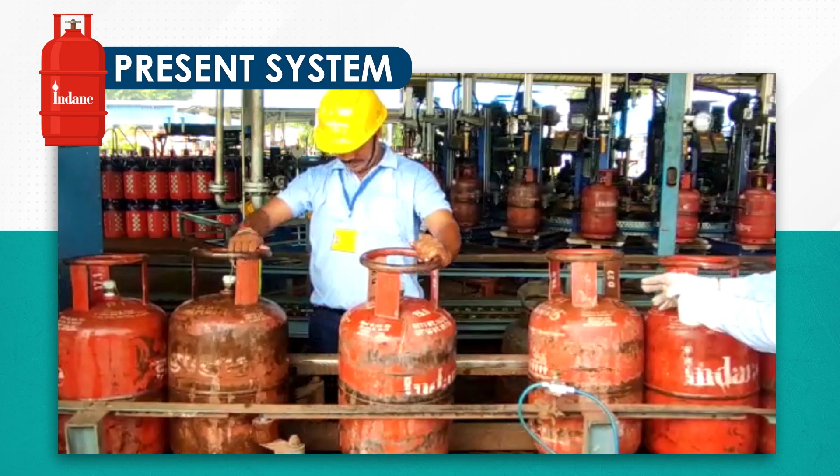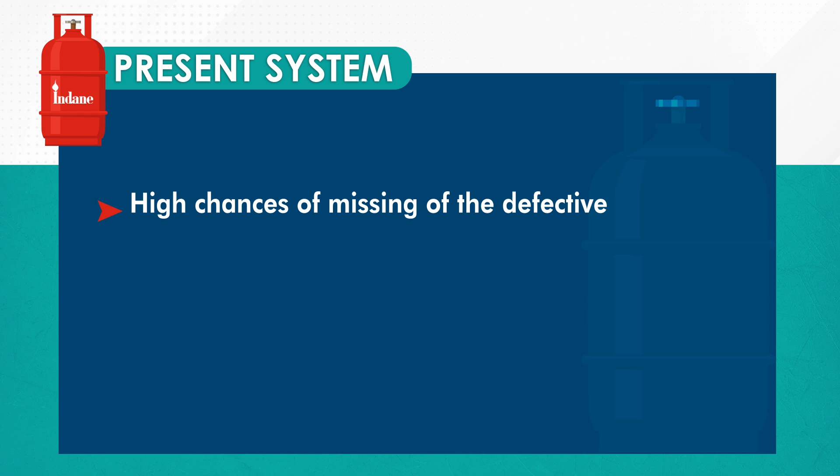Presently, haulage manpower is deployed at the plant for segregation of cylinders not fit for filling due to damaged VP ring and foot ring. These cylinders are sent for the VP ring foot ring straightener machine for further repair. There are high chances of missing a defective cylinder in the routine job by contract workers, requiring continuous monitoring and manual intervention.

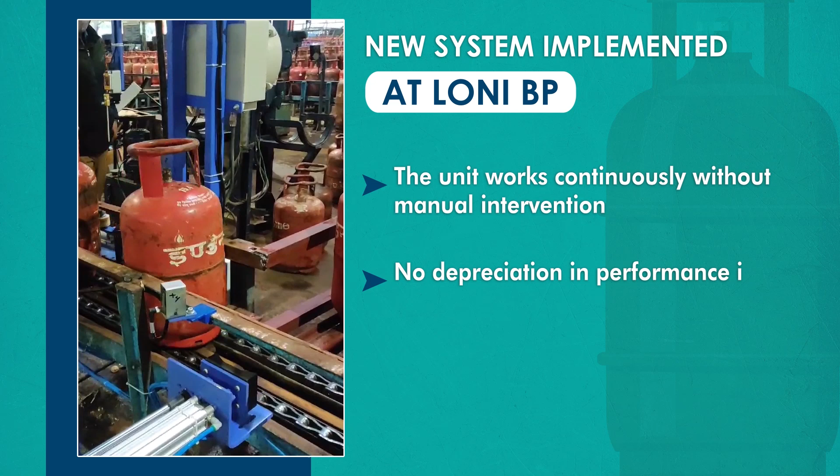A new system has been implemented at Loni BP. The unit works continuously without manual intervention, with no depreciation in performance throughout the day. One contract manpower is saved, which was previously deployed for HR segregation.

Working of the HR segregator: whenever a cylinder passes through sensor 1, the stopper stops another incoming cylinder.

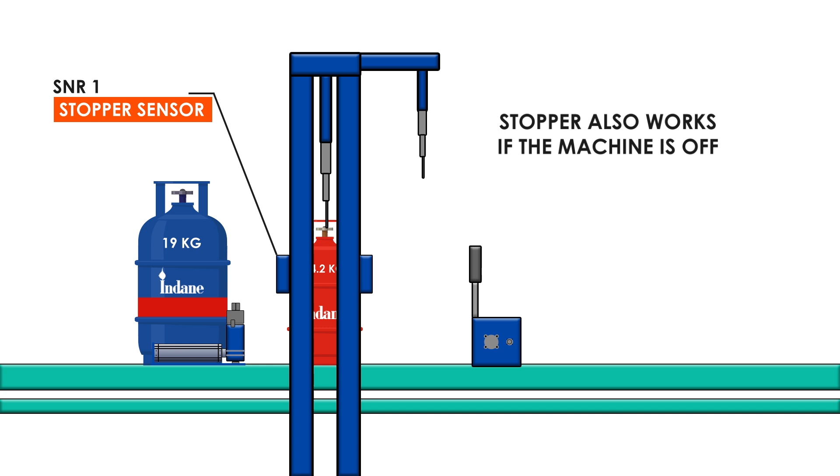This stopper also stops even when the machine is in the off condition. The stopper will also work if sensor 5 is active, indicating a downstream jamming case, irrespective of whether the machine is in operation or not.

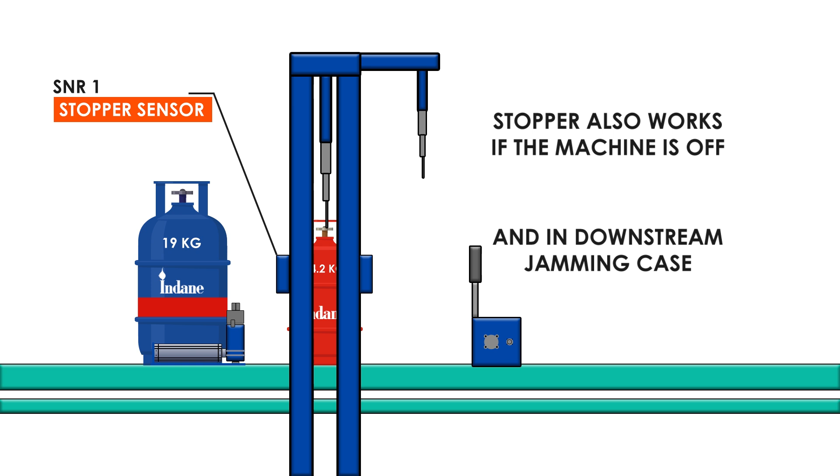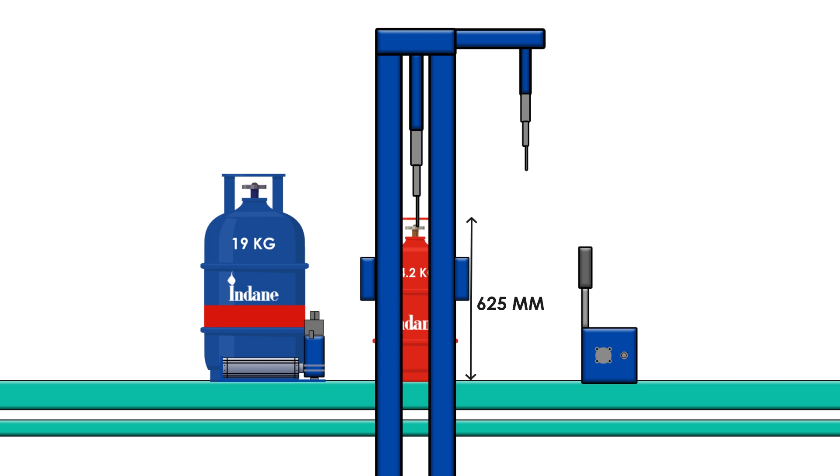Whenever a cylinder passes through sensor 2, simultaneously sensor 3 senses the cylinder's upper ring and lower ring height. The total height of the 14.2 kilogram cylinder is 625 mm, and the gap between the bottom of the cylinder and the foot ring base is 10 mm.

The first sensor limit switch is set at 615 mm for the 14.2 kilogram cylinder from the top of the conveyor chain, and the second sensor is set at 700 mm from the top of the conveyor chain.

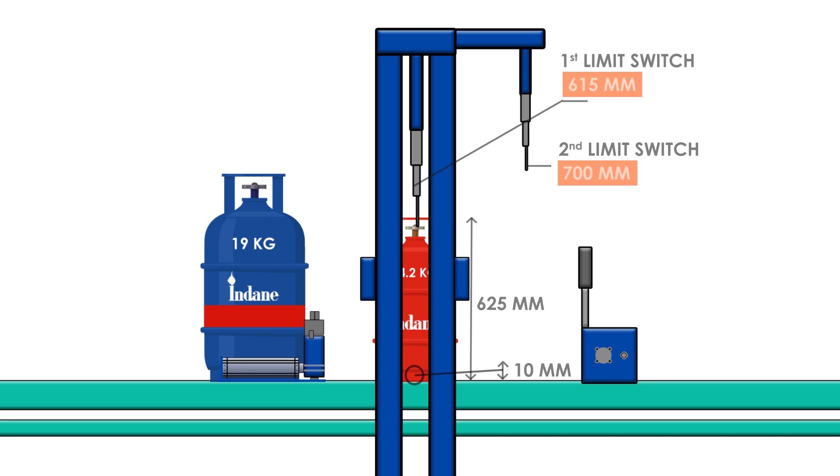Similarly, the height of the 19 kilogram cylinder is 725 mm, and the clearance between the foot ring base and the bottom of the cylinder is 25 mm. So the limit switch is set at 700 mm.

When the height of the cylinder is less than 700 mm, it gets rejected. When a cylinder crosses the sensor, the PLC checks the status of sensor 3. If the result is not active, then the cylinder will be rejected by the pusher to the rejection line, and if the result is active, then the cylinder will proceed to the main line.